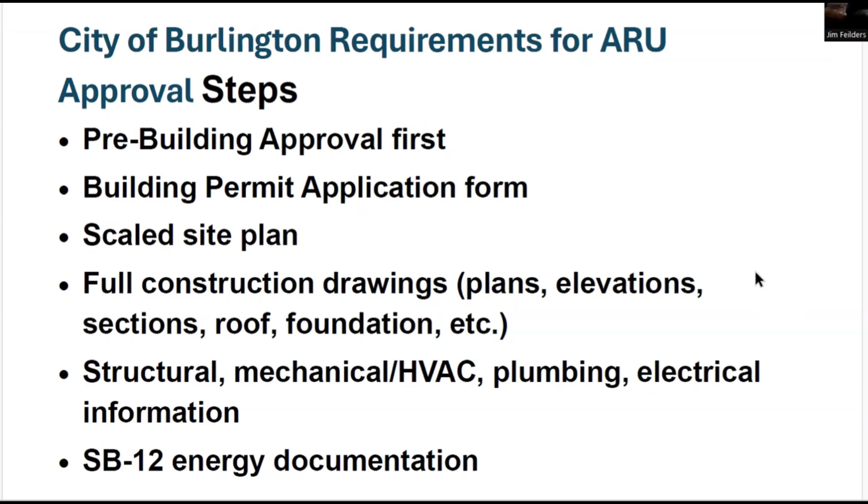So the steps involve, first of all, a pre-building approval. Then we're going to look at the building permit application form, which requires a scaled site plan, full construction drawings that involve plans, elevations, sections, roof, layout, foundation, etc. Then you also have to include structural, mechanical, plumbing, electrical information, and another component is the energy analysis under the SB 12 part of the building code.

Pre-building approval. So this is a submission to the zoning and development department, which includes forestry. So they will look at requiring an application form, and then you will require an up-to-date legal survey. There'll be a site plan required that shows the proposed work, all the setbacks. Then you need floor plans, elevations, an arborist report for tree protection, grading and drainage plan stamped by a professional engineer or surveyor. Then additional technical documents may be required depending on the details of the proposal.

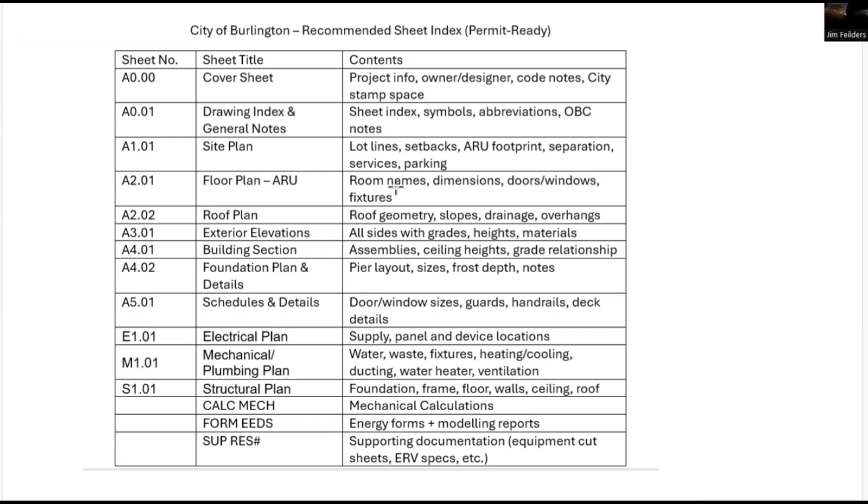So once you get through that hurdle, then looking at the building permit itself, it includes a number of things. This is a list of the various drawings or sheets that they referred to. So it gives us sheet number, the title, and the contents. I'm not going to go through everything in detail. The cover sheet is just a heading as to what it's about, and then there has to be a big blank space for the city to put in a stamp of their review details.

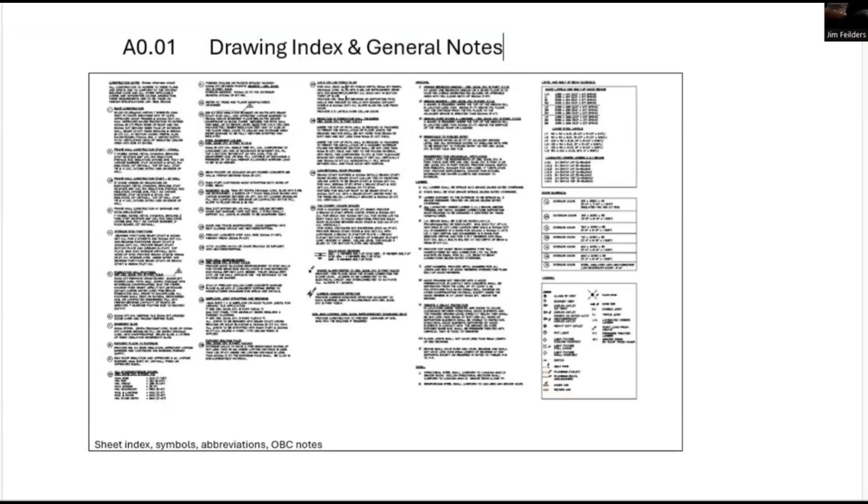Part of the submission package includes general notes, which are pretty standard across the industry. They cover a number of topics. Then you have to have a site plan with details of dimensions and zoning and whatnot. So in this case, my unit is proposed at the back. The lot front is at the bottom of the sheet.

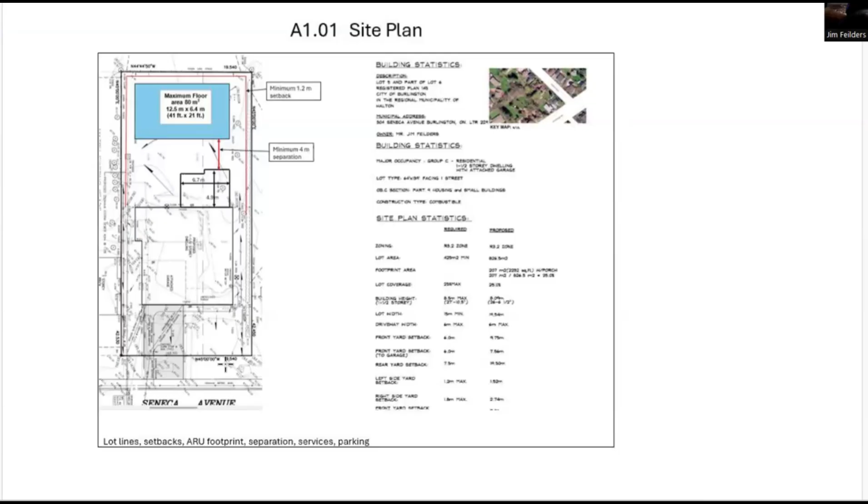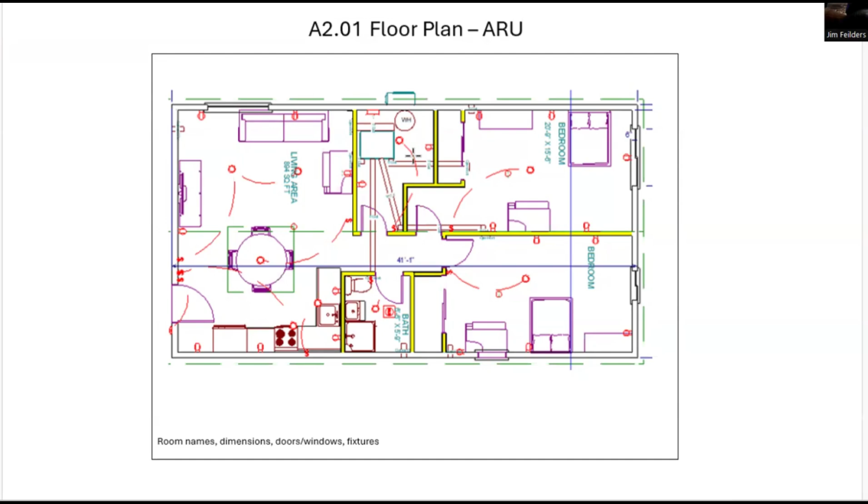You need a floor plan. So in this case, we're looking at roughly an 80 square meter footprint, and it includes 2 bedrooms, bathroom, kitchen, living dining area, and a little utility room that includes a water heater and the heating and cooling unit. It can provide storage as well. You need a roof plan. This isn't detailed as yet.

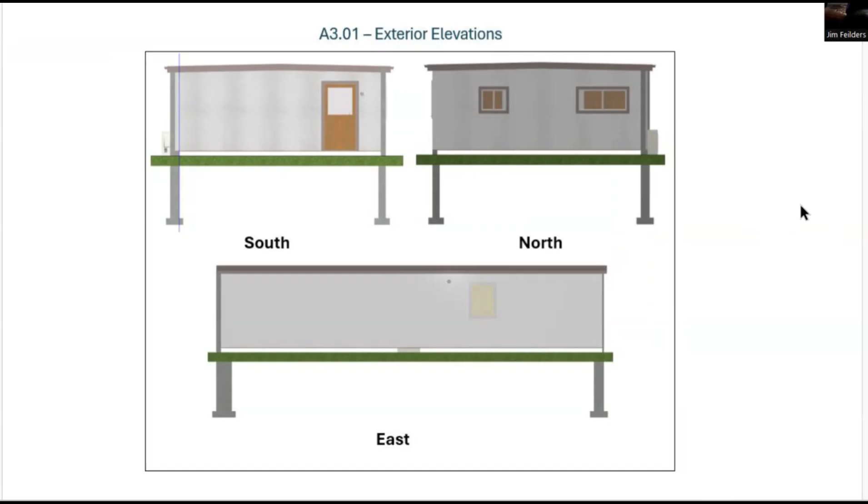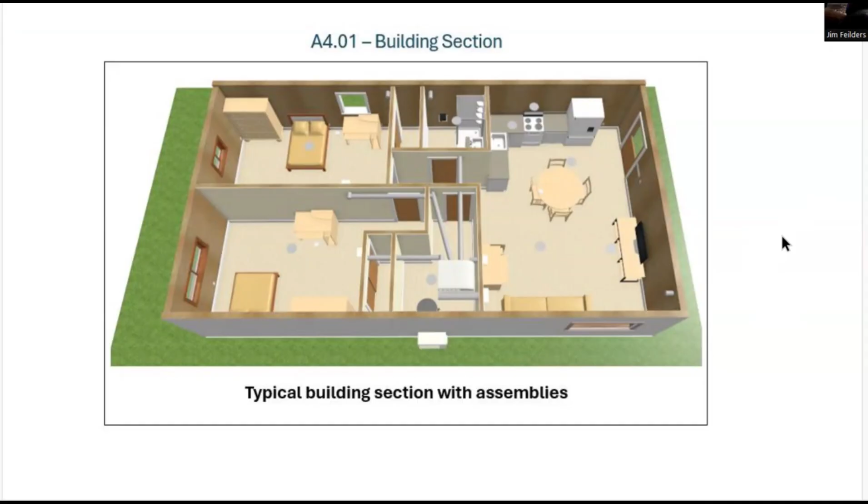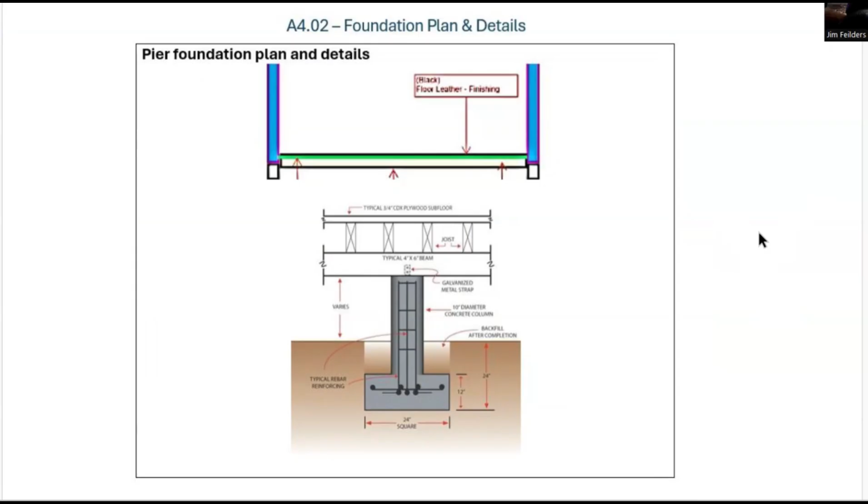You need elevations of the different sides. So here we have the 2 ends, and then the back and the front. You need a cross section. I don't have the ability to do that, but I've done this dollhouse view showing what the internal arrangements would look like. You need details of your foundation. I've shown a concrete pier design here, but a better alternative is probably helical piles. Then you can provide a number of schedules and details regarding windows, handrails, decks, etc.

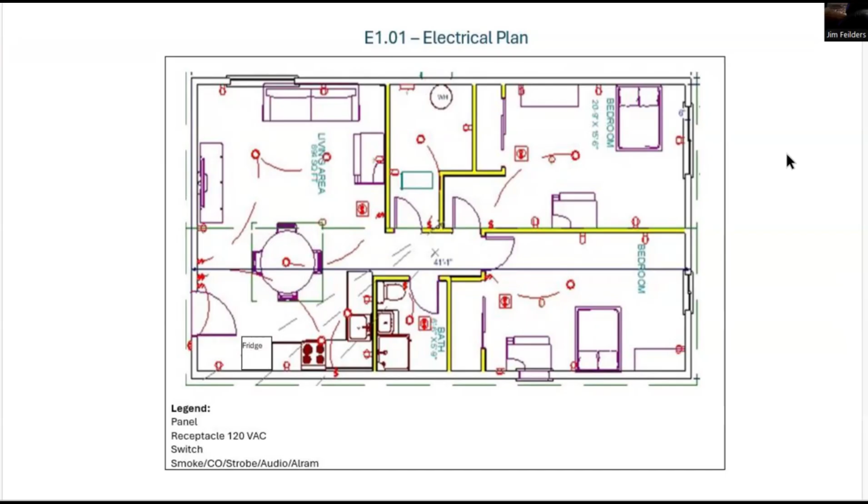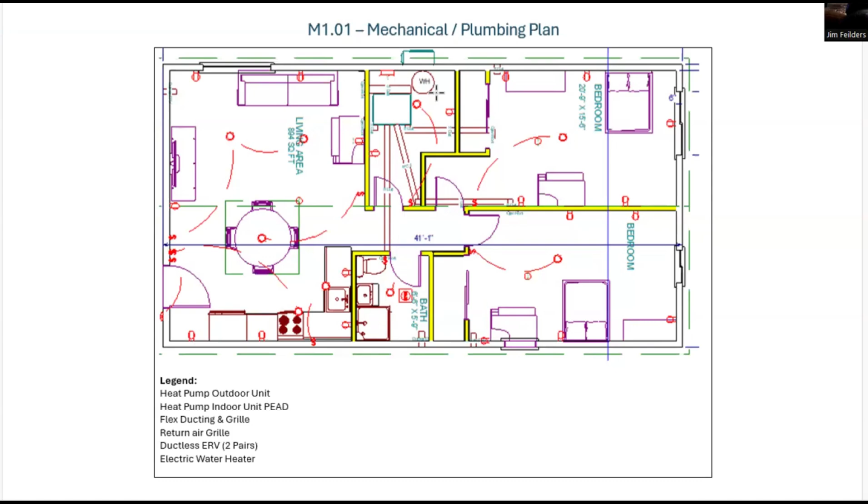Just repeating this because this also shows the location of plumbing fixtures for the kitchen. In this case, there's no dishwasher, it's a kitchen sink. Then backing onto that, you have toilet, sink and shower, bathtub. And there would be a water heater again in this utility room. You need to show a plumbing schematic, which just shows where the piping goes and the legend. This is not complete yet.

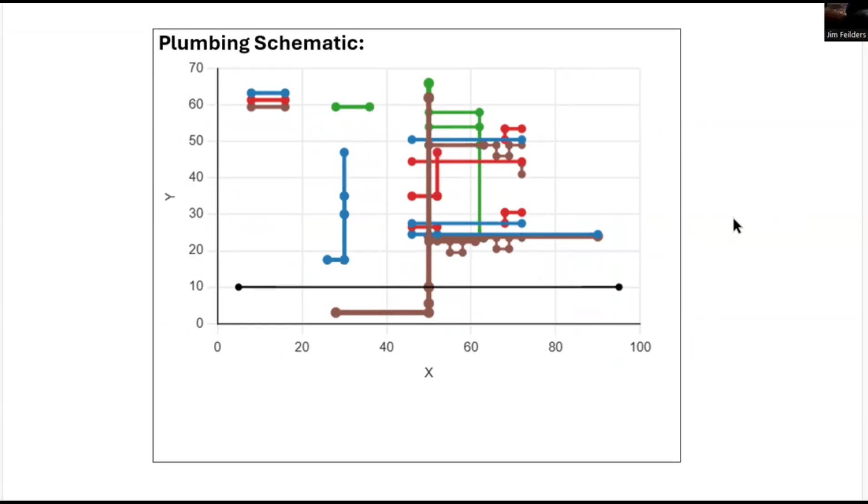Details of a water heater. Here we're showing an electric tank, provided by power from the panel, 240 volts, to provide the laundry equipment if there is one in the utility room. Then the kitchen and the bathroom.

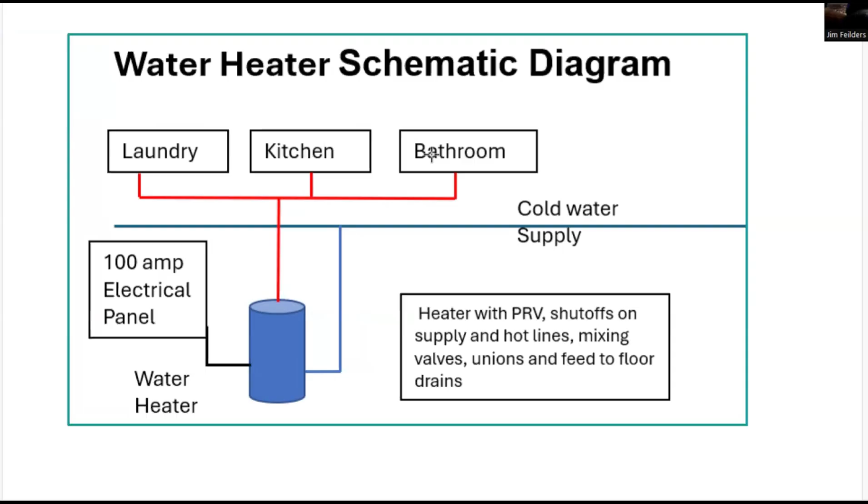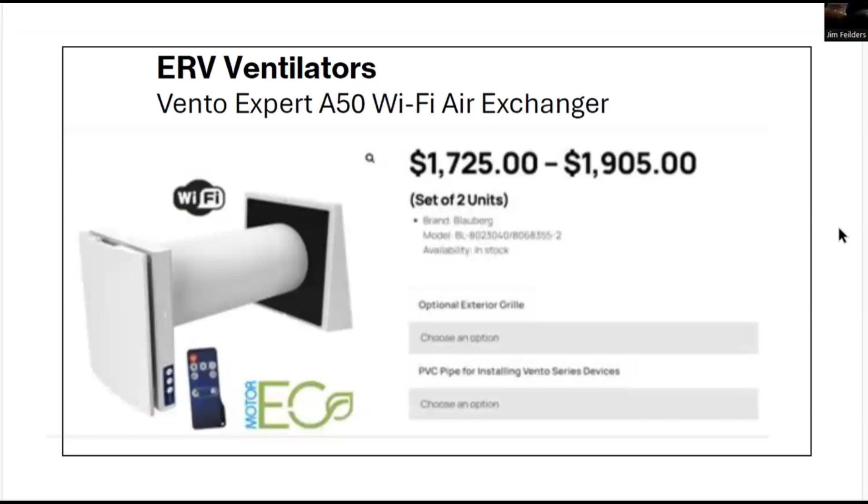You need to show ventilation. In this case, I'm proposing this Vento product, which comes in pairs, so they exhaust stale air and bring in fresh air that's preheated. There'd be two pairs, one for the main living area and another pair for the bedrooms. I propose to control this with a carbon dioxide monitor that will also control humidity.

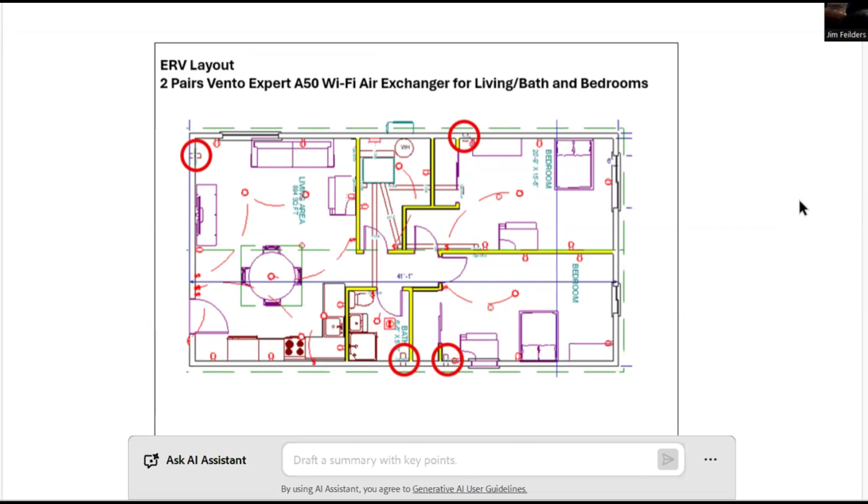In terms of heating and cooling, I found that the heat pump that has a central distribution unit is the best option. It provides adequate heating and cooling and not being oversized. And it can be ducted to reduce costs. This ceiling unit, or concealed unit as it's sometimes called, is provided by different manufacturers. I'm showing the Mitsubishi, and they call it a PEAD unit.

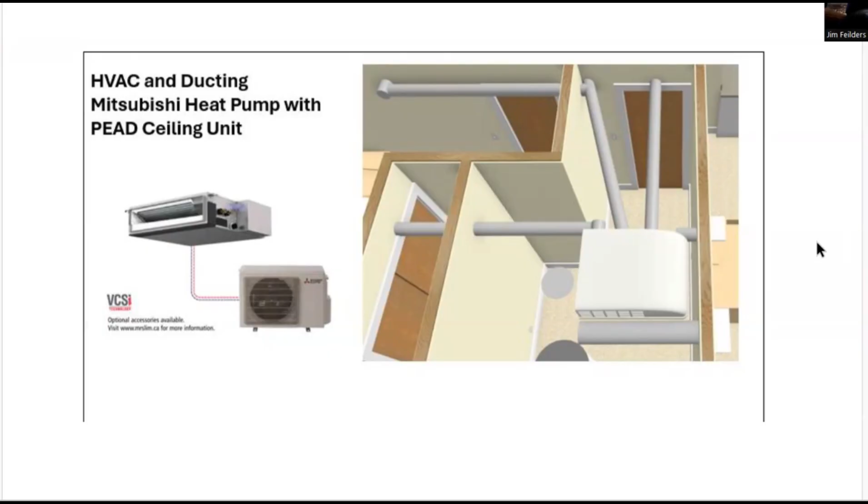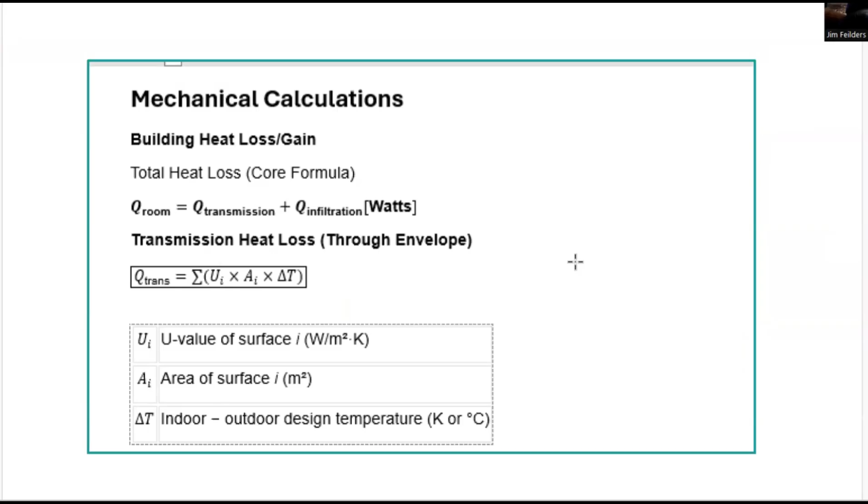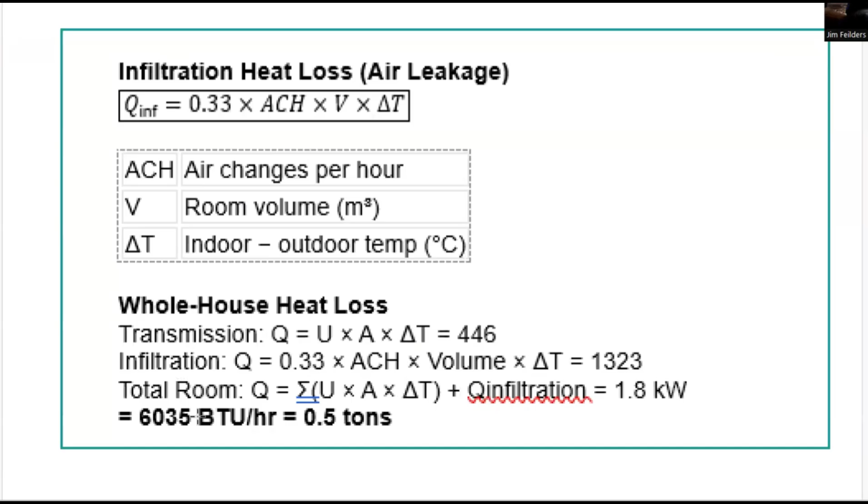You have to provide mechanical calculations. So in this case, you have to look at the heat loss and gain. So there are formulas for doing that. You have to look at the infiltration, heat loss. Again, use equations. So for this building, turns out that the heating requirement is just under half a ton, which is fairly small. So that's 6,000 BTUs per hour.

So again, heat pump sizing, because it's a small dwelling unit, doesn't require much heating or cooling. But most heat pumps on the market start around 9,000 BTUs an hour, which is just under 1 ton. And they can be oversized for applications like this. When you go to the indoor mini split units with internal heads on the wall and an outdoor unit, the heads start at 6,000 BTUs per hour.

So if you have 3 units in a small dwelling such as this, one in the central area and one in each of 2 bedrooms, it can be oversized. The outdoor unit with 3 ports comes in larger sizes. So when you get a 3 port, you usually have a unit that's 2 or 2.5 tons.

Again, providing more power than you need, which is expensive, but also can cause short cycling and that causes the unit not to work as efficiently in both heating and cooling. In cooling in particular, you may not get dehumidification. So I found that this PEAD unit is the best to use, and it's sized at 9,000 BTUs per hour.

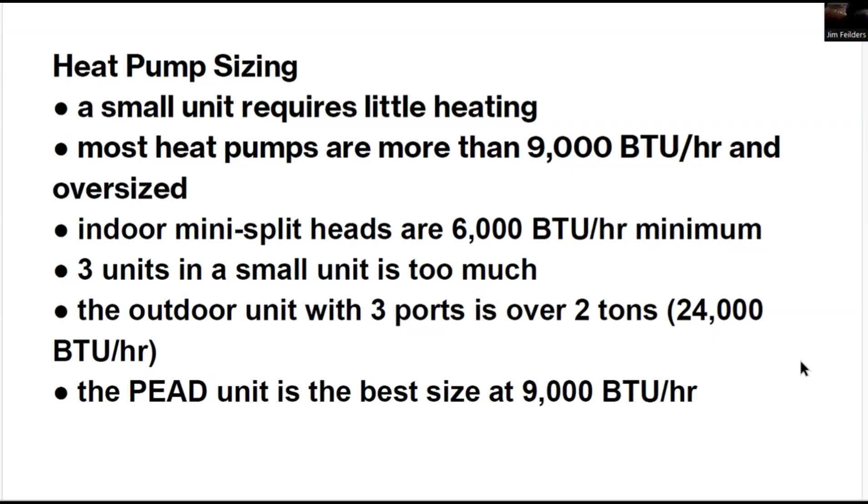So I am a dealer for the Mitsubishi products, and this unit, the last pricing I got, which is a little out of date, was $3,500 for both the indoor and outdoor unit. It's rated at 9,000 BTUs an hour, and that's the cooling capacity, and the heating can go up to 12,000.

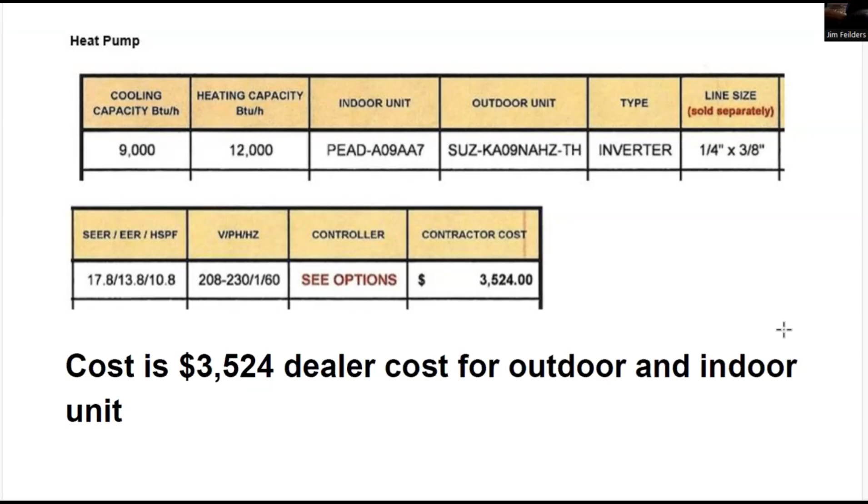You have to provide what are called energy forms, energy efficiency, design summary, and modeling reports. So I've started to fill this out, and you have to identify your heating zone and heating fuel source. In this case, the option is electric. You look at your wall area and amount of windows and glass. You can't have more than 22% of your gross wall area as glazing. In this case, I'm at 8%.

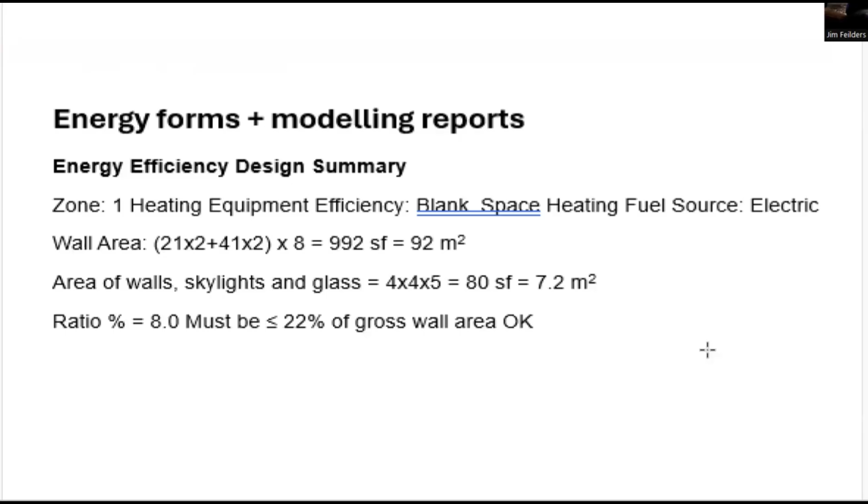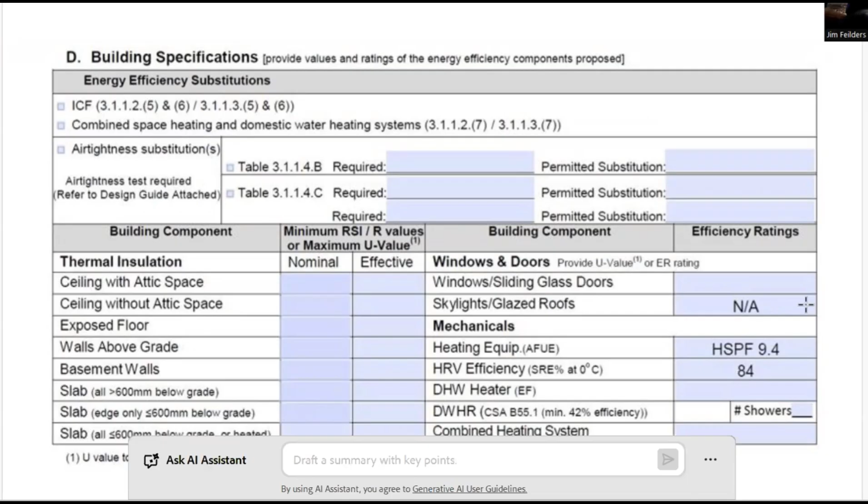Again, there's a form. You fill out all these details. It looks at a number of factors, R values for the building envelope components. This is not completely finished at this point. Then under the design of the building envelope, you can use prescriptive packages, which are packages that will comply with the building code requirements. So in this case, we would look at a C4, which is appropriate for electrically heated space, including heat pumps.

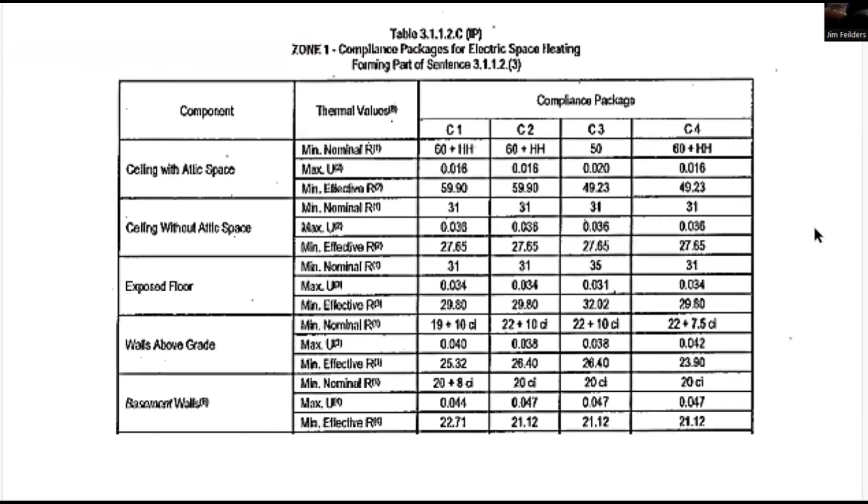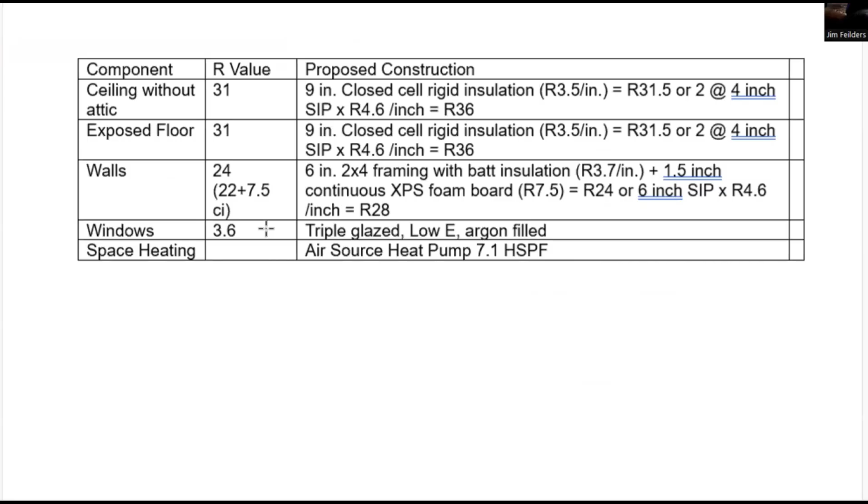So it gives the R values for ceilings, floors. The case here we have is exposed floor because there's no basement. Then walls and the roof, which is part of the ceiling. I have looked at different ways to achieve this with SIP panels and regular framing, wood framing with insulation and continuous rigid insulation on top. So R values are given here.

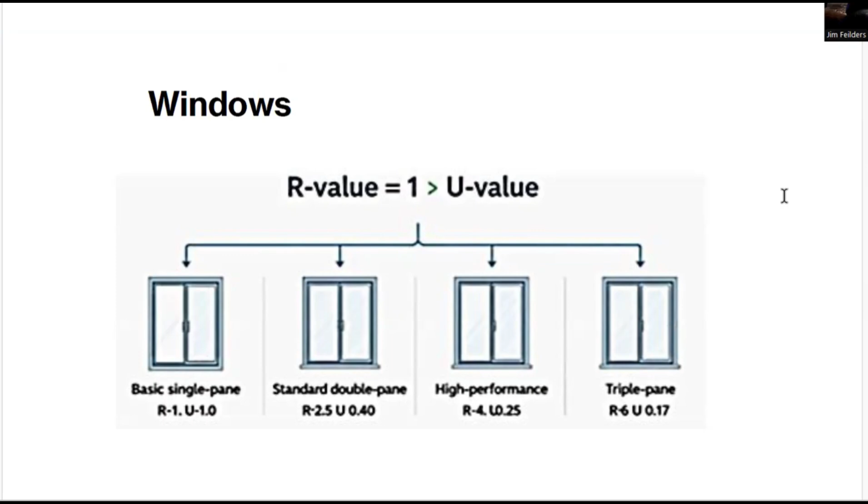Windows, you have to provide appropriate R value. This shows that a basic single pane window is not enough. And you can go with high performance and triple glazed windows and achieve the objectives. So when you look at all of this, we find that the process for a small unit is the same as for a large home. And the cost of a surveyor, arborist, and designer can be expensive.

Permit fees may be a little less because it's based on the size of the dwelling unit, but there is a minimum fee. So these costs could be minimized through thinking outside the box with ideas such as help of volunteers, say retired engineers and builders who would help, or maybe the paid professionals could give discounts or concessions. And if we look at group applications through a group such as a faith organization, that may be able to reduce costs. So in upcoming videos and presentations, I'll be looking at the breakdown of the costs.